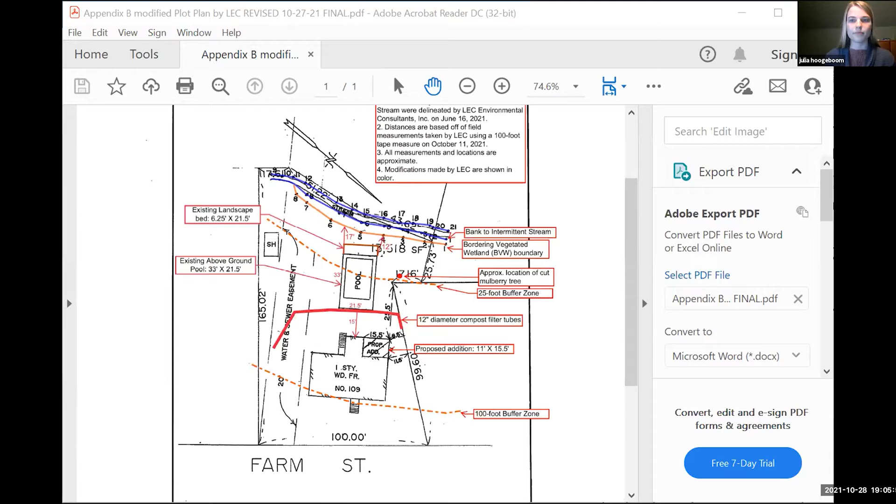Let me just find it here. Okay, can we all see that? Got it, great. Okay, can you see it now? Still see it, yes. Okay, great.

There is an intermittent stream that flows along the rear property boundary. The dwelling is surrounded by lawn and landscape plants, but there is a vegetated upland area that's not lawn, located within the northwestern corner of the property. The backyard does contain an above ground swimming pool surrounded by gravel and enclosed by 6-inch timber posts. The homeowners hired a contractor to construct the swimming pool in 2020, last year, and one mulberry tree was cut to prevent berries from falling into the pool area.

So if you can see my cursor, can you all see my cursor? No, I don't see it. I'm not sure how to make the cursor visible, to be honest, but if you look on the right hand of this plan, there is a red dot, and that is the approximate location of the mulberry tree that was cut. Okay, we see that.

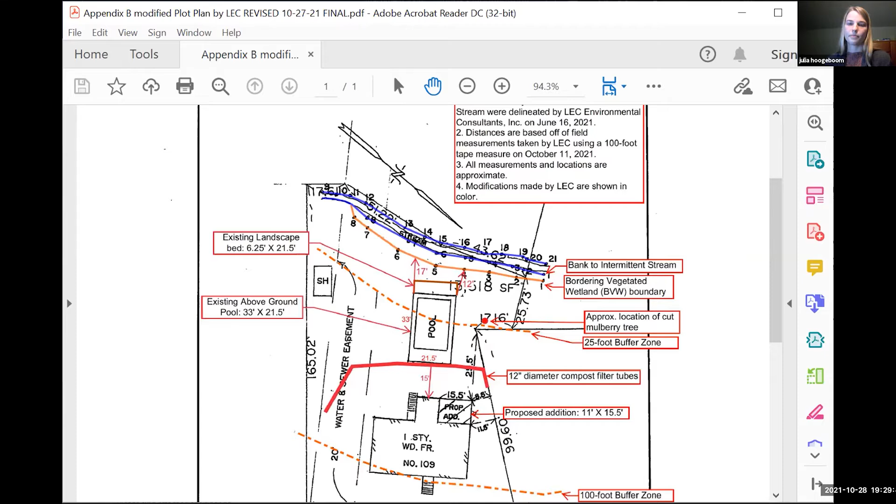The picture's on page 13 of the PDF. Can someone pull it up? I'm not doing too well trying to find it. Julia's getting that, one second here. Oh, so that's the pool - is that the actual pool? Yes, scroll down. Oh, that's nice.

And this is the landscape bed as well as the pool. So that's where you want to provide the landscaping? That's what we have proposed right now. Well, that's really not - how far away from the BVW are you? So that is within the 25 foot, it is about, let's see, about 17 feet from the BVW.

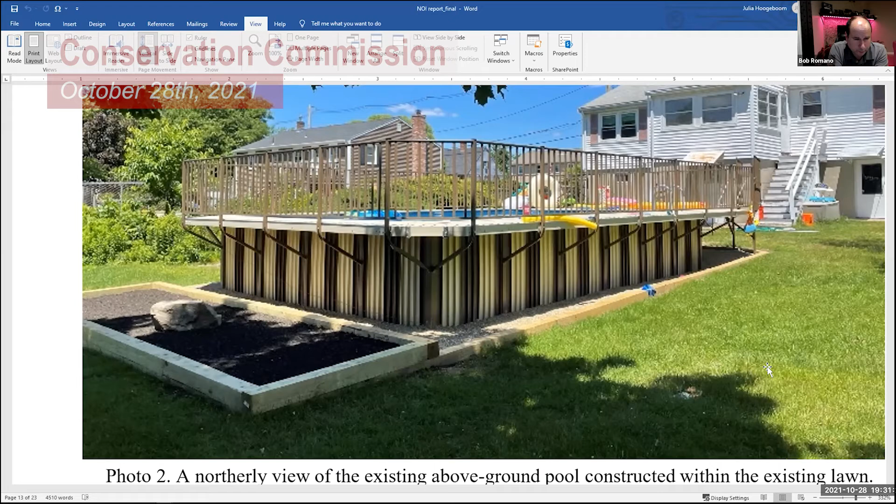So maybe you can go through the benefits of that versus, because I don't know how that replaces the tree, as far as the value of the tree and what it's providing for this area. I don't think you can do that in a planting box. Yeah, probably there should be some enhanced plantings towards the BVW area. Yeah, so we were going off of the tree removal policy on the website, which requires 3 replacement shrubs for the 1 removed tree.

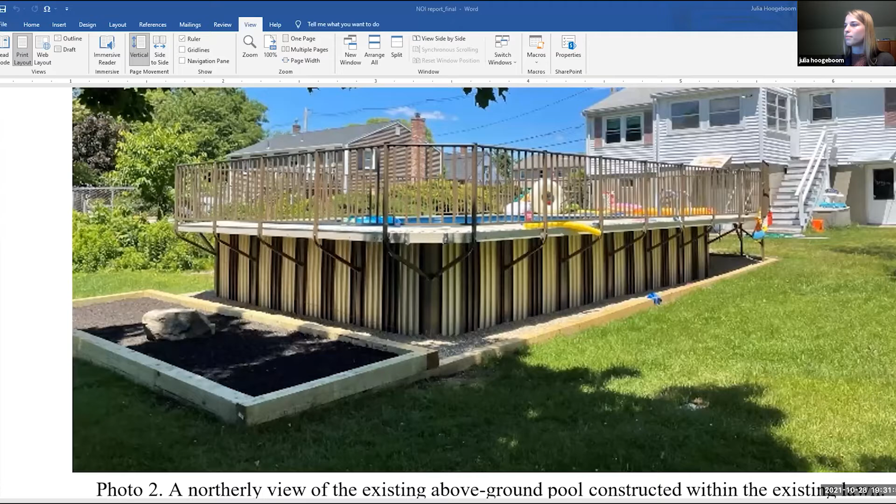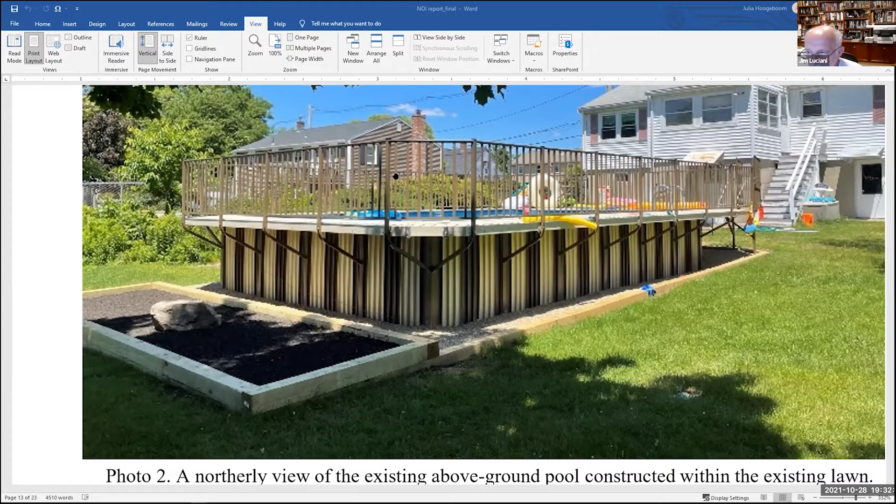So we were using that as our guideline. But certainly, if the commission would like something closer to the BVW, I can pull up the plan again, but perhaps those 3 shrubs could instead go in the lawn area along the stream bank. So how does that planting bed assist in the value of the BVW? I don't get the connection there. I would say you should put a tree in there closer to the BVW because it's going to suck up water better than those shrubs or little plants you're talking about. What's most important is that whatever you put in there enhances the BVW, and I don't think that does it.

But would 3 replacement shrubs rather than 1 sapling tree enhance the BVW if we put them within the BVW area? Well, how big do they get?

The cultivars can get up to 5 feet on center. Do you think that's the most valuable plant for the application we're showing here? If you're trying to provide shading in the brook, what would you be trying to enhance? These native cultivars still provide habitat for native pollinators.

That's good. I would say it really just needs to be closer to the BVW. I think that would help stop the BVW from traveling closer to the pool, because if you take away enough water from the area, the plants are not going to go uphill.

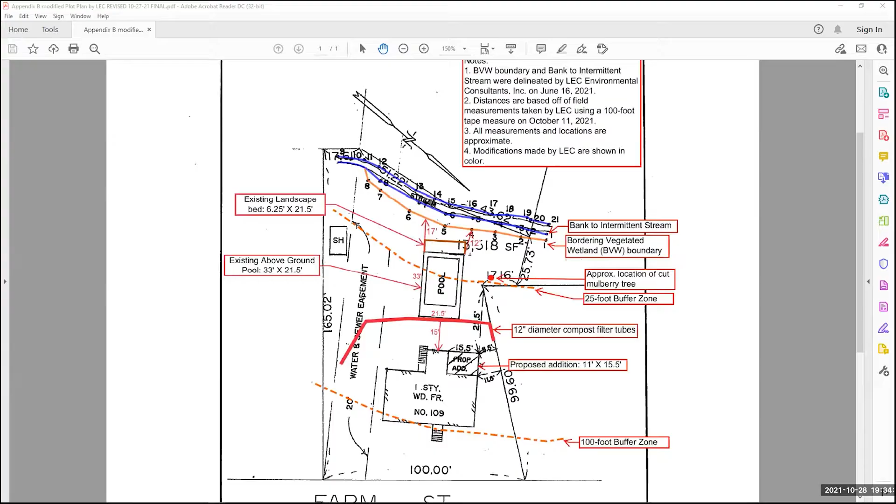Between the two flags, 6 and 7, on the plot plan, there's an area where it dips down, basically a strip with two trees between 6 and 7. Essentially between the orange line and the blue line there's an area that dips down. We would be willing to plant there as well, and when it floods it gets a lot of water there.

So we'd move out of the planter box. We were thinking the planter box just because it was there, and the actual bottom of the planter box does touch the ground there. So we thought maybe that could be a spot since we already had the box there, but it looks somewhat removed from even the BVW, it doesn't seem like a good option.

So the BVW is the orange line, right? I just think there's a better option. I like your other idea of going further along the stream, as long as we can. Can I ask one question though? I'm still okay with doing it between there, but the box is closer than the tree was to the BVW.

Okay, but I don't think... But the tree was a substantial tree. I looked at the aerials, that was a big tree that provided a lot of shade. So in fairness, I think that... No, that's fine, like I said, I don't have a problem.

We don't have a problem putting the bushes in between 6 and 7 there, and even over near flag 2 in the corner over there. Maybe we could put 1 or 2 over there, and then 3 or 4 between 6 and 7. Would that be enough for you guys?

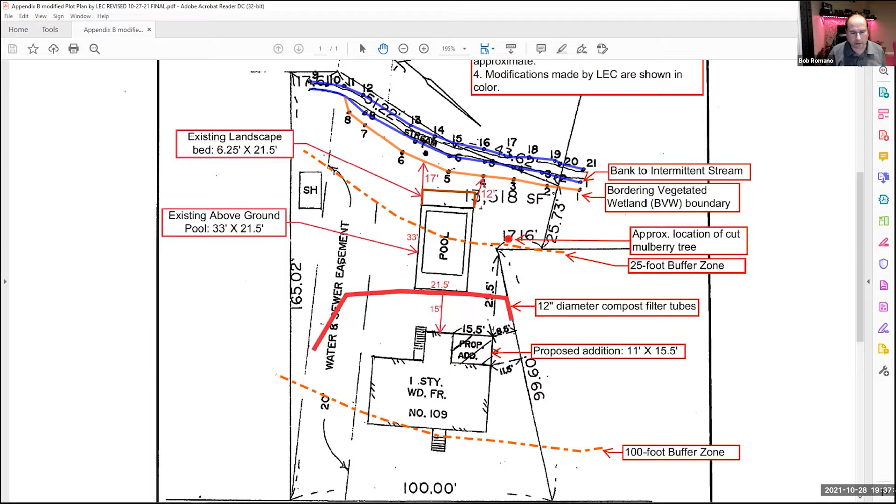So it would be time to visit if somebody wanted to. Do other members of the commission feel like they can envision what this should look like? We can feel that this really does make a material step forward that offsets a step backward, then that's fine. But it's hard for me to look at this schematic and make that conclusion.

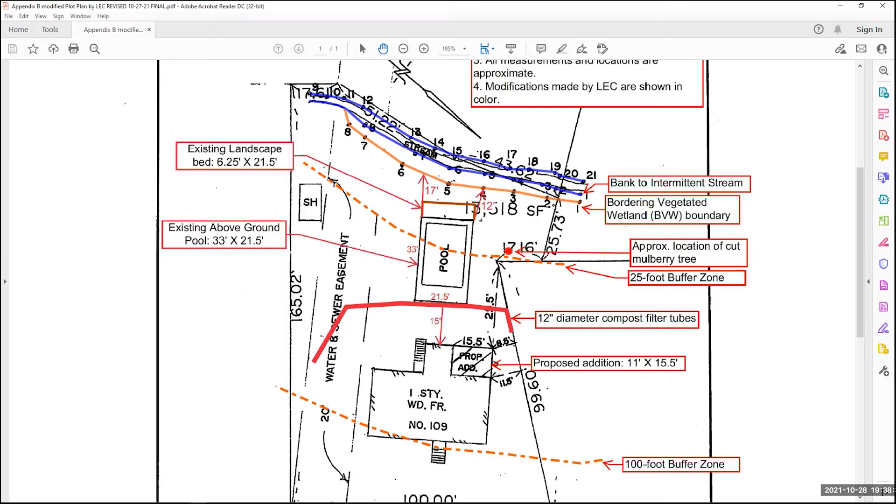That's all. Julia, I believe in your paperwork you had some pictures of that area. Would that be helpful to show those? Of the wetland corner, the stream area, where they flag it. Let me pull those up.

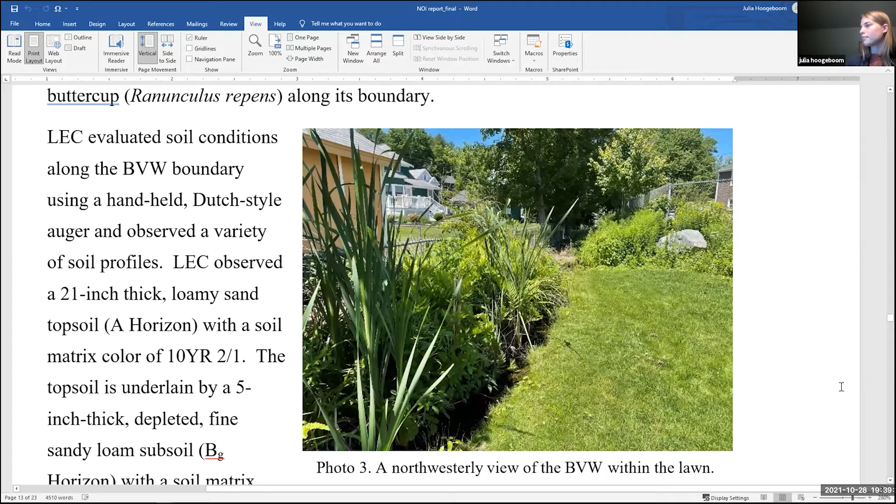So that's down in the corner by flags 1, 2, and 3 on the plot plan. That looks pretty good there. There's also another view I can pull up. I definitely remember this property. You guys have better memories than I do. I remember it too.

Is that the tree you took down? No, this is the stream along the rear property boundary. You can see the pool in the background of this photo to the right. The tree was taken down on the other side of the pool. So this is the area I was talking about between 6 and 7 that we would be okay with planting on, probably closer to the far tree instead of the one right here in the corner, down in this little area really close to the opening of the stream.

And these trees still exist? Yes. Okay, so they're providing some shade for sure. Well, it's providing shade, and also what might be beneficial for this situation, because they have a water problem with the stream, is plants that absorb a lot of water. So if there's something that can do that, that's what we should be shooting for, I would think.

Julia, you'd know better than I would what would satisfy that requirement. What would be the best plants that we could put up there to help alleviate their water problem? For plants, we can certainly put in wetland shrubs, like sweet pepperbush. They are a wetland plant that are water loving, so those would certainly help. And how do they compare to a tree? I know a tree can suck up a lot of water.

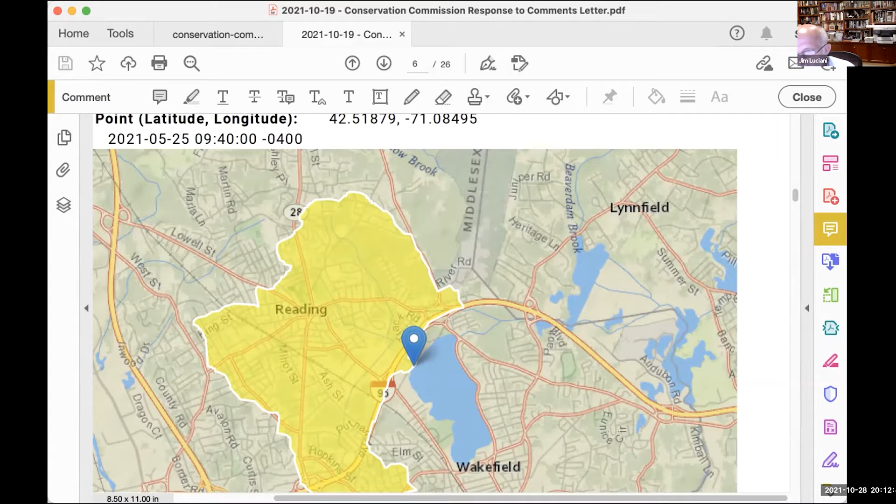Are you thinking that the water from here is flowing down here, going underneath 95 at this location? I don't know. It doesn't sound like you've investigated it enough to tell me, or even know if there's any real effect. This may all be for nothing, or maybe it's going to affect your design. I don't know—Nicholas, do you have any other information on this?

Yeah, this is Nick with Allen and Major Associates. Scott, I've visibly seen the pipe coming underneath 95, just west of our property. You've seen that, right? Yes, and it comes right out to where you've delineated the top of bank for the stream going through there. Correct. And I don't recall seeing water coming out of it, but I'm sure there is.

Have you seen water flowing out of that pipe in the field? My recollection is that it had water at the time of viewing, yes. But I've never investigated this location right here. I haven't either, that's beyond our scope. It's very far away, but to see if there's any kind of a pipe underneath 95 at that location, I just don't know.

To elaborate on why you're not seeing water from that stream enter the lake, like Scott said, the culvert that passes below the parkway is pitched backwards back towards our site. So the stream and the wetlands within our property, the water has to build up to a certain elevation before it starts overflowing into the lake. So when you were out there witnessing the recent storm, there may not have been enough water built up yet, or it may have been passing underneath an obstruction like leaves and branches, not visible. But I haven't, at least recently, evaluated the condition of that outfall at the lake edge from that culvert.

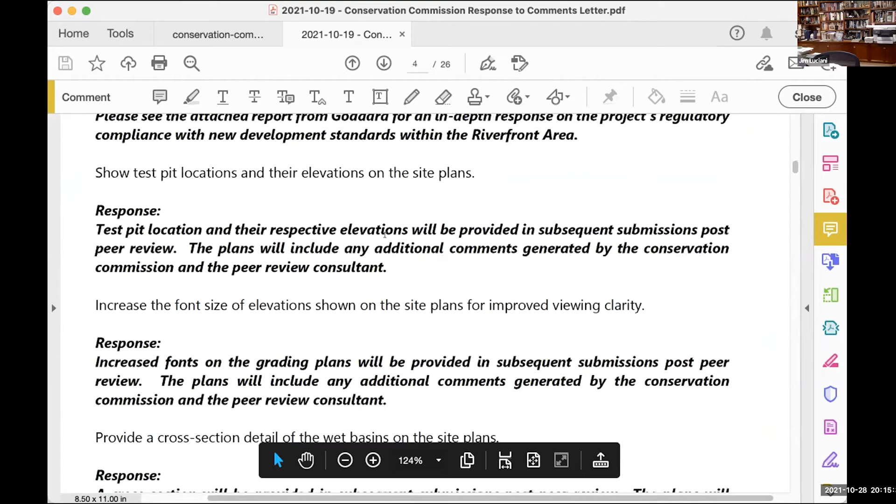I was looking at old maps of this area, and it seems to me, like Bob was pointing out, there's another path that ties right into the Saugus River. So if that was the outfall, that may be the outfall for this 3.5 acres, not Quannapowitt Parkway, and maybe it is. You've got 2.5 feet of head between the 95 pipe and Quannapowitt Parkway pipe. There's a lot of head there, it should flow.

And if we can just focus really quickly, back on the scope of our work. No, this is important, I want an answer on it. I'm not going to let go until we get an answer.

I just wanted to put in there that everything from our development sheet flows into that stream, regardless if the 9 acres from Reading goes there or not. That's where it's going to be going under proposed conditions, but if it ends up flowing the other way, it might have an effect on your design.

So I think I'd like to keep moving forward. I've noted that there's an ongoing question that's important to be answered here. Nick and I will put our heads together for a bit further field investigation that's going to be substantially off-site. But I'll also investigate that connection point between the stream and the lake to the better satisfaction of the commission. Maybe there need to be some more spot grades, or is the stream just full, silted up?

Well, I think we have a lot of spot grades, right, Nick? It's not a matter of more survey work that's needed as far as I'm understanding. Is that correct, Nick? Yeah, I think we have all the information we need within our property, including the inverts of that culvert going into the lake, which again is sloped backwards, which is causing the stagnation of the water and the appearance of no flow. Exactly. Oh, okay, it's not an appearance, it would be no flow.

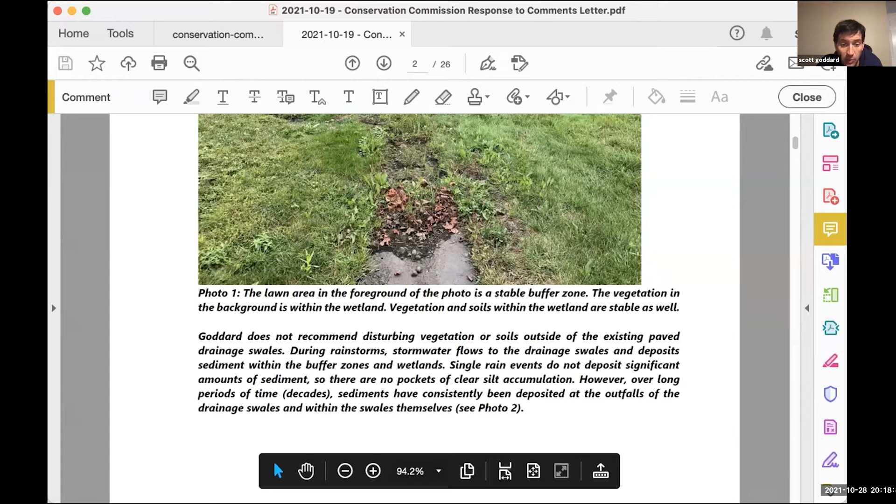But what we can do is take care of deferred maintenance of the swales, as all stormwater features should be. These swales should be regularly cleaned, and that's exactly what we propose to do with these decades-long swales. There's one there, I think there's another picture right here. Yeah, there's another one here. We'll go through and clean out these swales so that we don't have transportation of the sediment within these swales during storm events.

It's probably reasonable to continue with normal sweeping procedures on site. When you say you're going to clean out the swales, is there asphalt on the bottom of the swales? Yes. So would you be repairing that? Would you be taking that out and making a new swale?

No, this is a very temporary measure, because once construction of this project begins, all of these features go away. This is just temporary in the meantime, to further alleviate the issues we're currently seeing - just some delayed maintenance of the existing conditions. Once the new stormwater infrastructure Nick's going to talk about tonight goes into effect, everything out there becomes defunct. It's getting a complete overhaul to meet current regulatory standards.

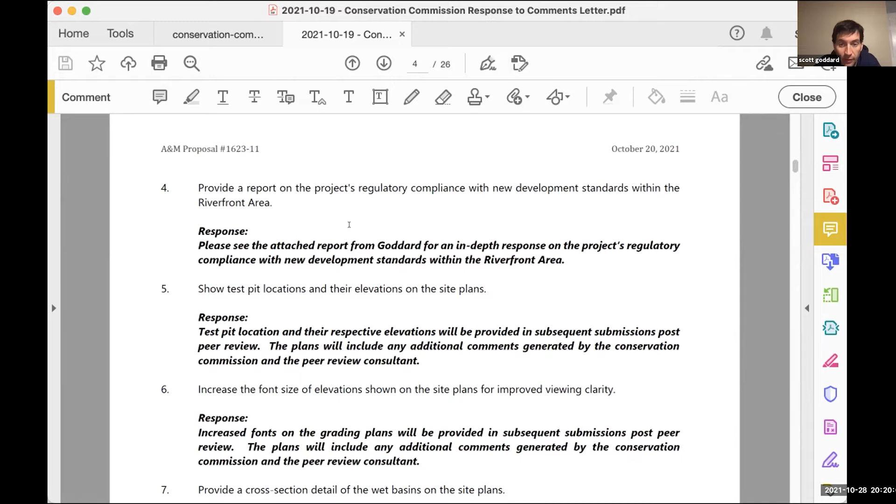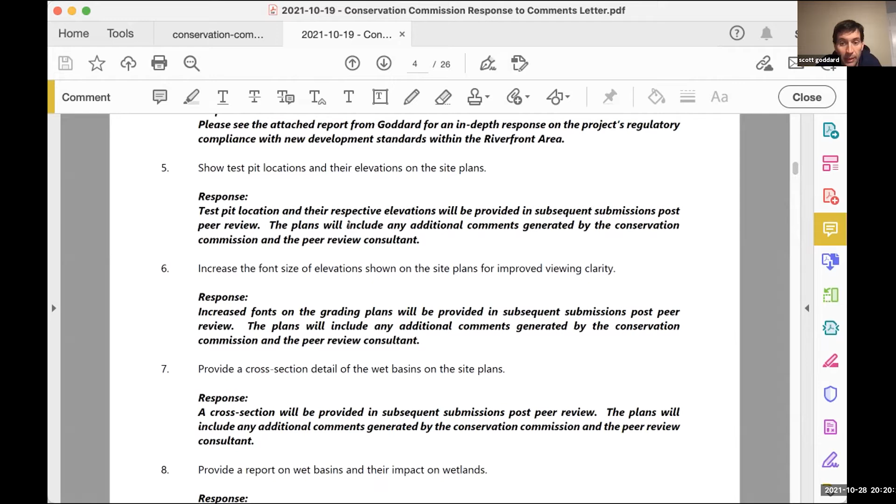Number 4 talks about regulatory compliance for new development standards in the riverfront area - I'm going to save that till last since it's at the very bottom. Number 5 was showing the test pit locations and elevations on the site plans. That'll be included in subsequent plans - a fairly minor add-on, but we'll save that till we have a new plan submission set.

So when would that be? Is that when your plans are finally all approved? You're going to supply that information? I can provide some color on that. Candidly, we have some minor plan revisions in the works that largely don't impact our Concom submission, but are still in the works for a ZBA submission. So we'd be expecting to submit a minor modification in the next few weeks, at which point we'll include that in the plan set.

So you're just waiting to get all your revisions together and put it on one plan. That's exactly right, Jim. So we'll see that information before we get to any point that we're finished with this. Absolutely. If through the BSC peer review we come up with other modifications needed to the site plan and a new set is submitted, that set will include that data.

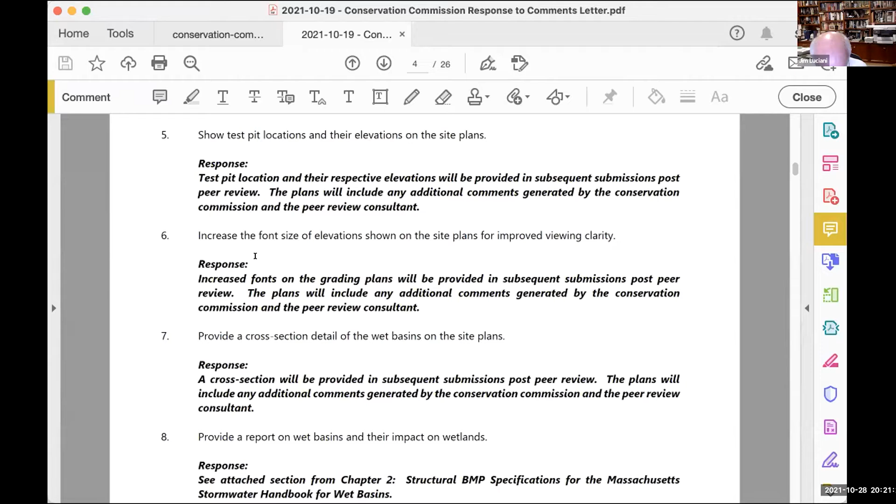As well as point number 6, the font size of the elevation request - something else that will be detailed on the next plan set revision. Same with the cross section of the wet basins. There's an attached response to this as well that includes further discussion of wet basins. I think we'll let that be part of the presentation tonight with Nick.

There was a question about the soil suitability assessment for on-site sewage disposal forms, and this is simply a standard form. That's not necessarily indicating there's a sewage disposal system being proposed, because there is not, but it's a standard form used by the Commonwealth of Massachusetts DEP to log soil conditions and high groundwater conditions.

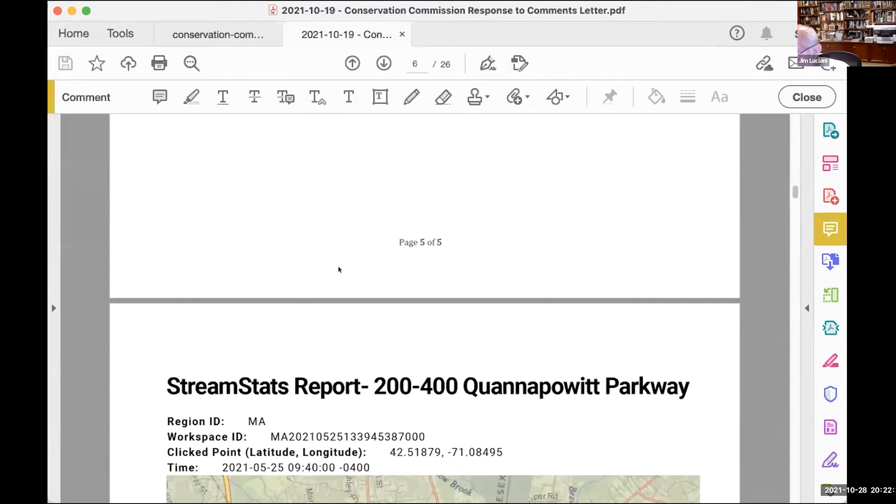But that form also has a signature page for whoever is providing that information. I know the last page of that form was to have someone sign it to say that they filled out the form. Correct - are you saying the form was unsigned? Is that what the comment is? No, if you look at the last page on Form 11, it's a signature page saying that you're attesting you've done this correctly.

I don't know if you've seen that page, but there should be someone's name on it to say they've done the work. And I haven't seen it - is your comment that there was no name listed? Is that the comment? No, there's the form, you sent us the other pages, but you didn't send us the last page.

Yeah, I can comment on that. I don't think that was provided by Haley and Aldrich. Matt, maybe we just circle back with them, get that signed form, and we can attach it to these soil logs. Okay.

So we attached the stream stats analysis, and then there was a regulatory compliance report. The discussion we had during the riverfront analysis was that this project is really a textbook redevelopment project. Nearly the entirety of this riverfront is previously developed, with a significant portion of it being degraded. Some portions are previously developed but non-degraded - those are the landscape islands and the lawn area up against the riverfront area. So this really is a redevelopment project under 310 CMR 10.58(5).

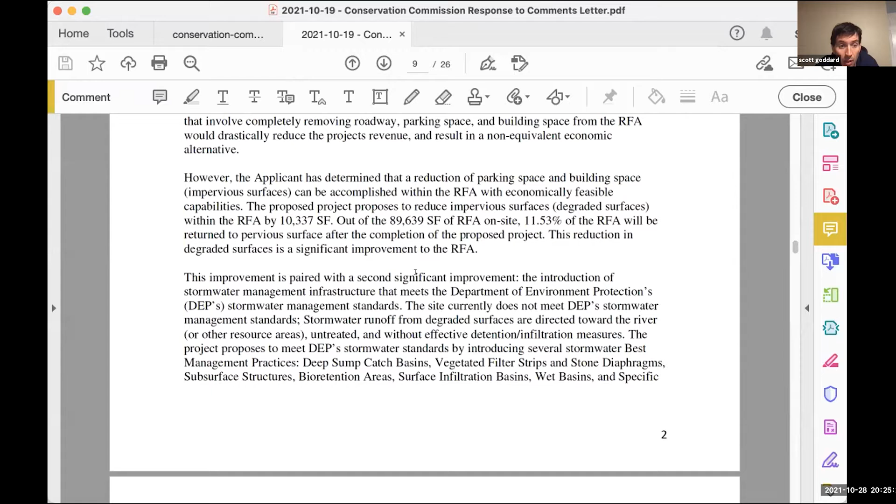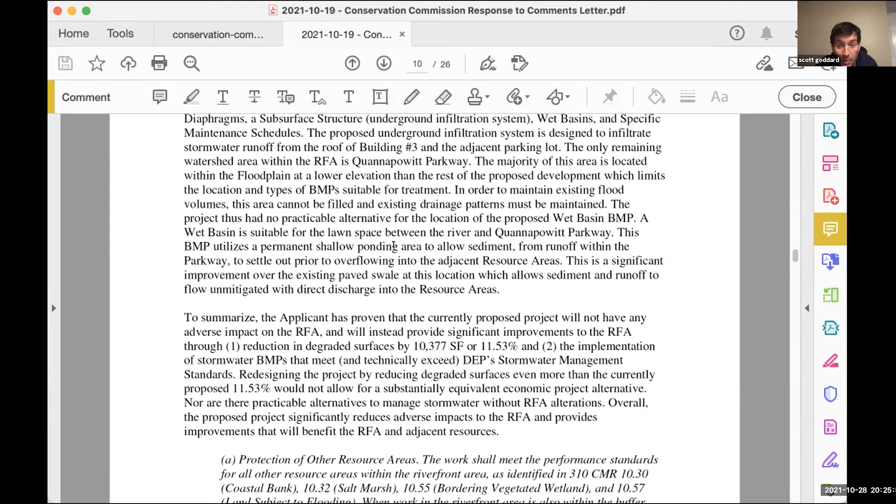This area talks about us taking 11.53% of the riverfront area and returning it to pervious surfaces that are currently impervious. So instead of further impacting riverfront area, we're actually improving it in the other direction, which is the very opposite of a new development kind of process. We talk about protection of other resource areas, which we have some consideration to bordering land subject to flooding. We have no rare species.

We talk about economic alternatives and how to do an alternatives analysis. Again, for redevelopment, there's no standard for an alternatives analysis because the standard is you have to make the site better. When you do a new development process, you're looking at which alternative is proposed that is economically equivalent and meets the standard of no adverse impact. No adverse impact is the whole 10% deal.

So the alternatives we talked about was keeping the project just the way it is. That is a very viable alternative for the site. In fact, before this development was proposed, there was consideration for reuse of that current building. That would not have any stormwater upgrades, and it would not remove any of the impervious surfaces within the riverfront area. All those degradations currently existing within the riverfront area would stay, and that meets all the laws for that current use to stay. So our proposed activity is actually far superior to that.

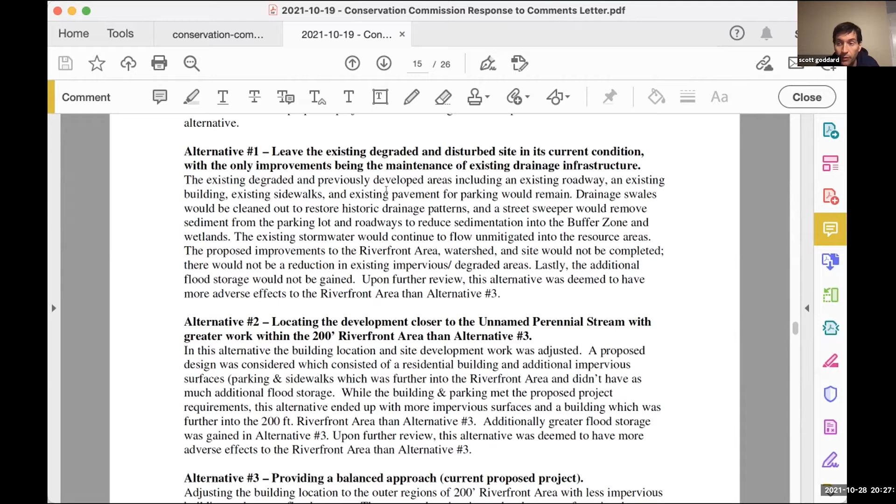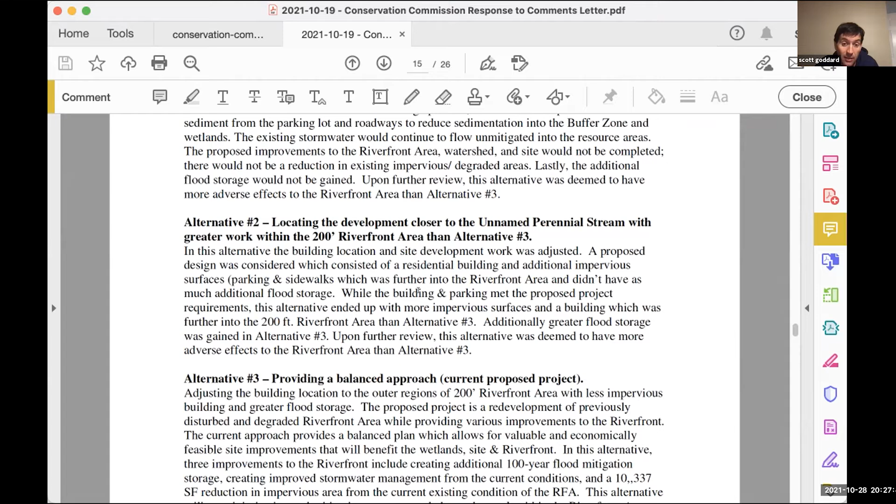The second alternative would be that we could take this whole development and shift it all closer to the river and still meet the standards for not further degrading the riverfront area. That 11.53% of riverfront area that we're removing the asphalt in, we wouldn't have to do that. We could keep it as it is, or potentially if we apply new development standards, we could increase that by even another 10%. So that standard, though it could meet the regulations, doesn't have less adverse impact to the riverfront area than our current proposal. So we have what we believe is a very balanced approach.

Our current proposal, we see as a project that improves the riverfront area ecologically—stormwater, setbacks, degraded surfaces within riverfront area—all being improved to the benefit of the river. That's outlined in here. Standard D is the no significant adverse impact standard.

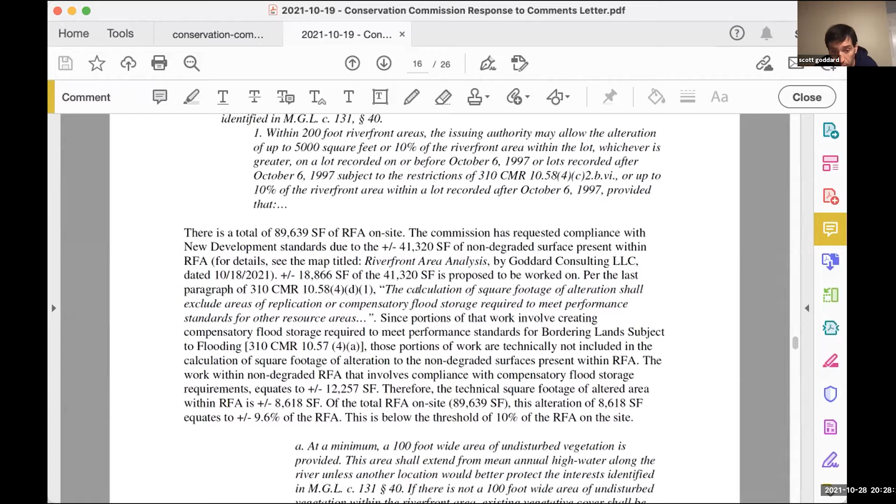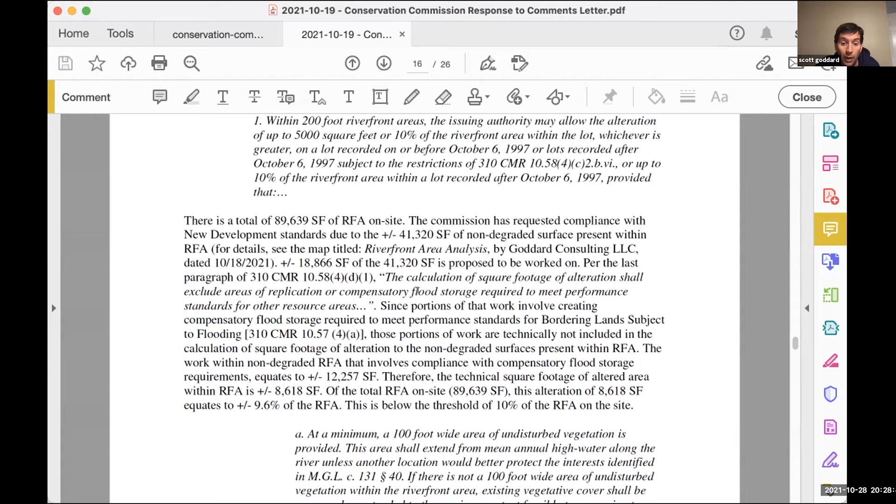There's less than 10% of areas that are currently lawn that would then become not lawn. If you look at them as if everything currently was staying there, that's not an appropriate way to do it, but that's the only way to evaluate a new construction standard for a project like this. We do keep that at less than 10%—it's at 9.6%. So it meets that standard if we apply it in that sense.

We also are required to do stormwater management in accordance with the policy. That's going to be the purpose of the balance of tonight's meeting—to talk about how, in fact, this property is now going to be subject to current stormwater management.

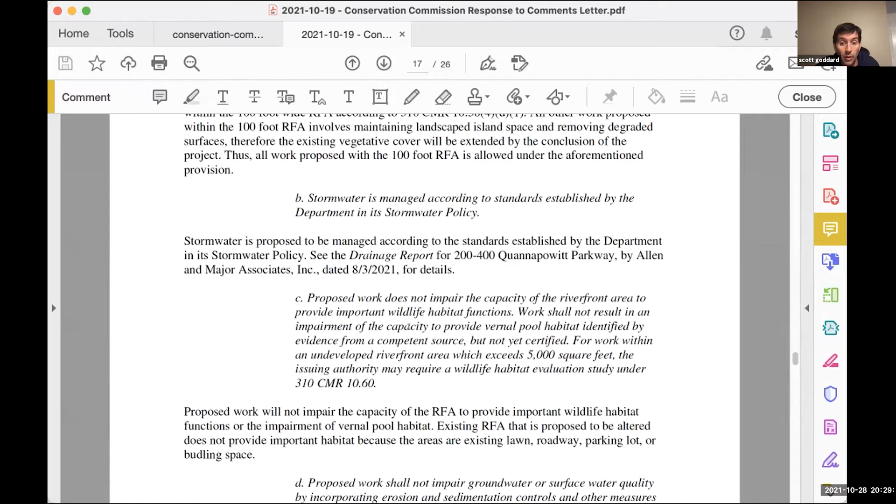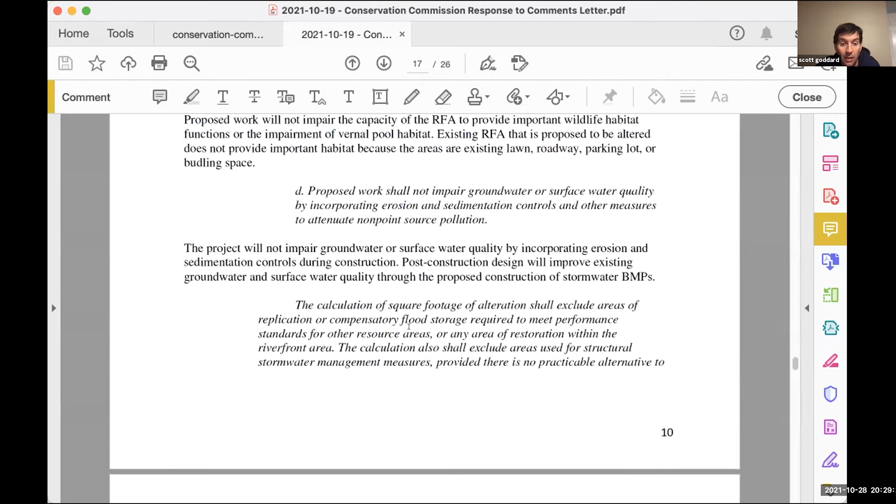So then we also have the ability to not count the area of the stormwater against the 10% or the alterations within riverfront area. That's allowable by new development standards. That's right here: the calculation shall exclude the areas used for structural stormwater management.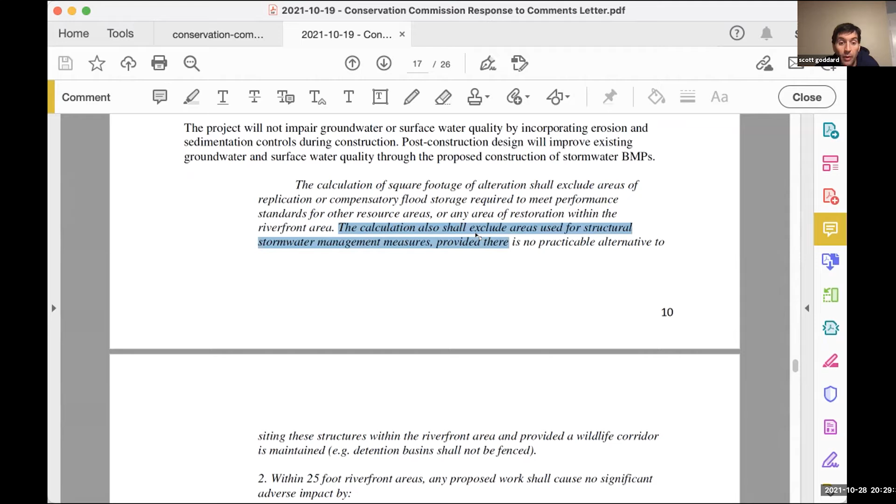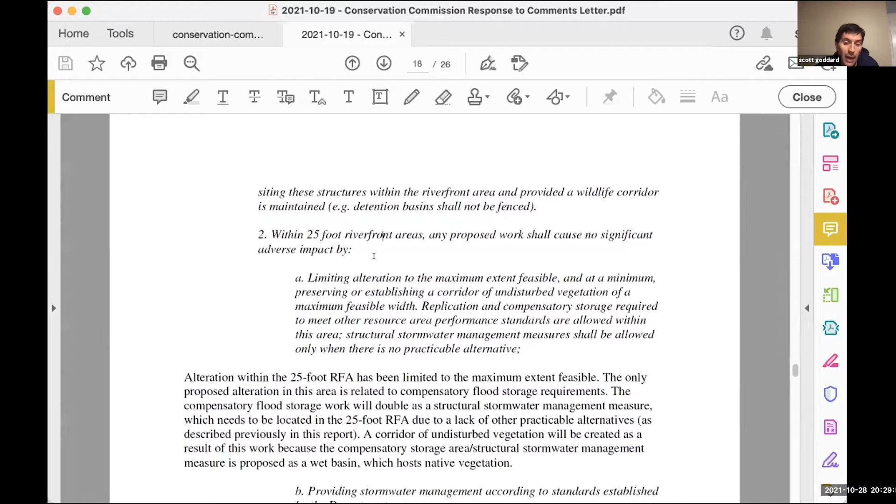We looked at ways in which that can be pulled back further. Nick's going to be able to talk about that tonight, about why the stormwater is proposed to stay where it is and why it can't be pulled further back. But I think that will be a useful topic to talk about after Nick gives his presentation this evening.

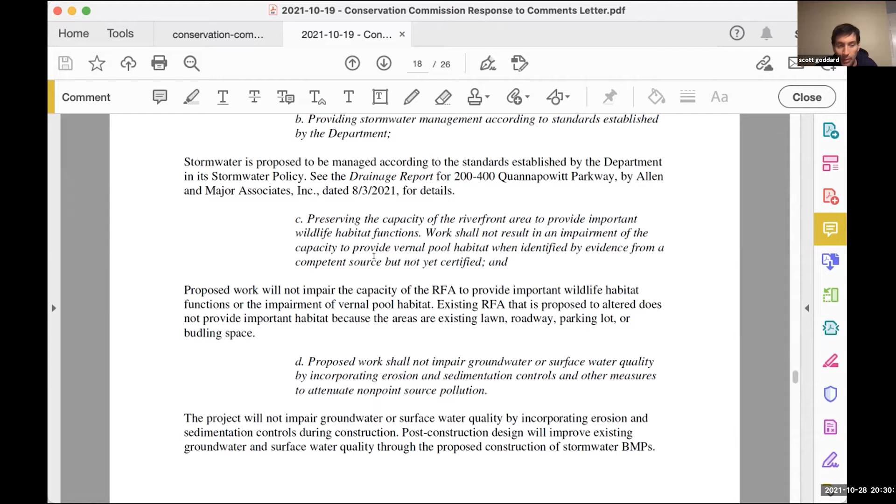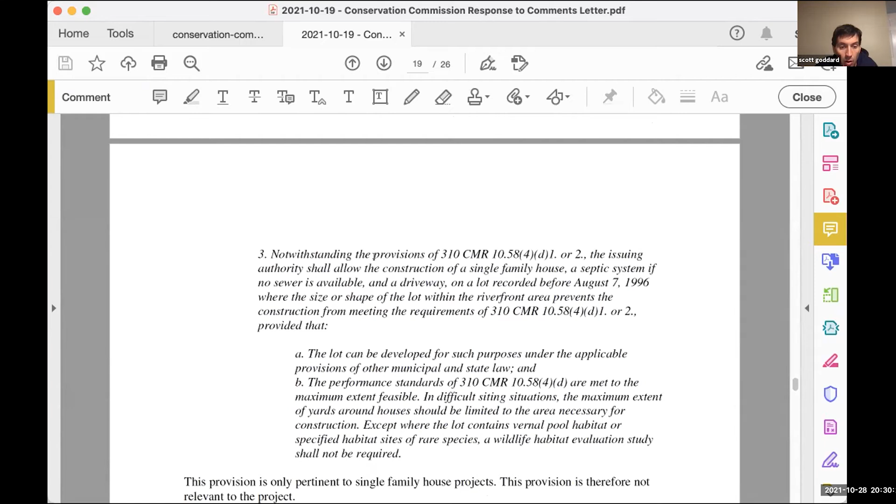The preservation of the capacity for wildlife habitat—the stormwater management feature is going to act as a wildlife habitat corridor and enhance the current absence of one, because it's basically just lawn area right now. So we're going to be improving that area as well. Your 25-foot zone is going to be further protected than it currently is. So all that is working to the favor of the commission and their regulations via this project. You can read through this if you'd like, and we can talk about it more.

My overall view on the riverfront standards is this: it's a redevelopment project, which requires a more strict set of regulations to meet the new development standards. So if the commission wants the highest level of protection for this stream and riverfront area, the commission will want to apply the redevelopment standards. The applicant and its team have done that very thing. There are substantial improvements being made to this riverfront area that I think should be applauded, which will provide improvements not just to the riverfront area, but also the receiving waters, the lake in this particular case.

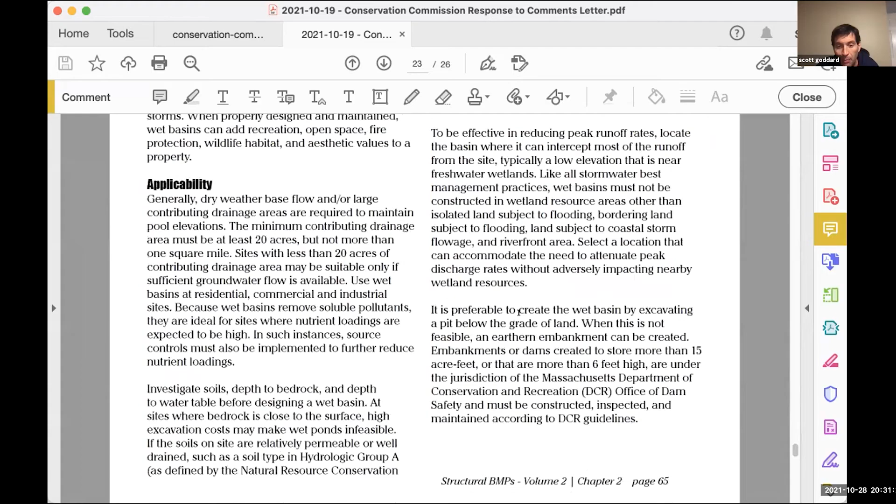There were some attachments discussing how wet basins function, which is a separate topic now. I think this can be brought back up as Nick presents how wet basins work and their role in the stormwater management system. Rather than take up more time tonight since we want to emphasize stormwater, that's kind of a recap of the outstanding matters from the prior weeks. I'm happy to take brief questions on it before we move on to stormwater.

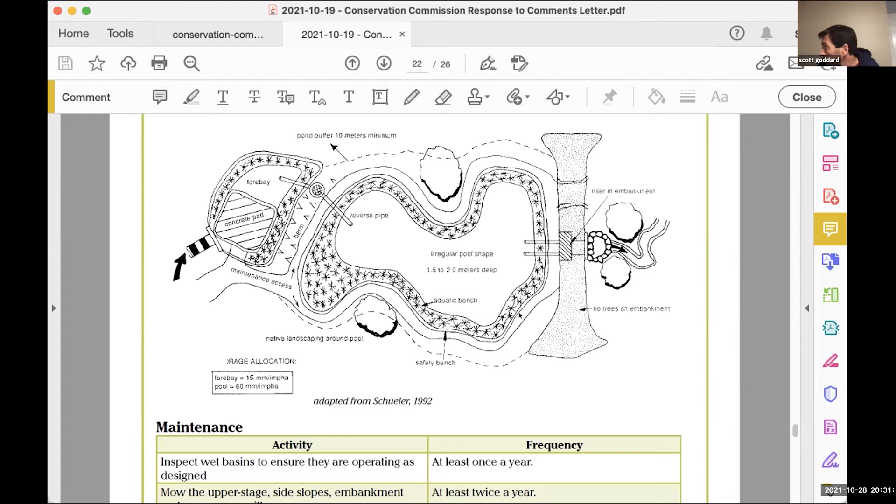I have a question if I might start. It's not really about the review that you did here, it's more a question to the commission. And that is, actually, it's a question to you: are you applying under 10.58(5) and want to stick with 10.58(5)? Yes. Okay, so then I guess my question is, because we have a peer review, do we

want to ask the peer reviewer to take a look at both standards and do an evaluation under both, or do we want to say this applicant has applied under 10.58(5) redevelopment, just evaluate it under redevelopment? Because I think we should give our peer reviewer some guidance.

That would be the request of the applicant, is to review it under 5, and I think that's the more strict standard. So I would hope the commission would go along with that approach.

Okay, so we clearly have the applicant's answer, and I guess my question to the commission, for the benefit of the peer reviewer, is what you want to do here. Do you want to have it looked at for both, or just stick with the one?

I think I'd just go with your recommendation, Elaine, myself anyway. Which is to do what? Whichever one you said would be more beneficial. It sounds reasonable to me to call this a redevelopment.

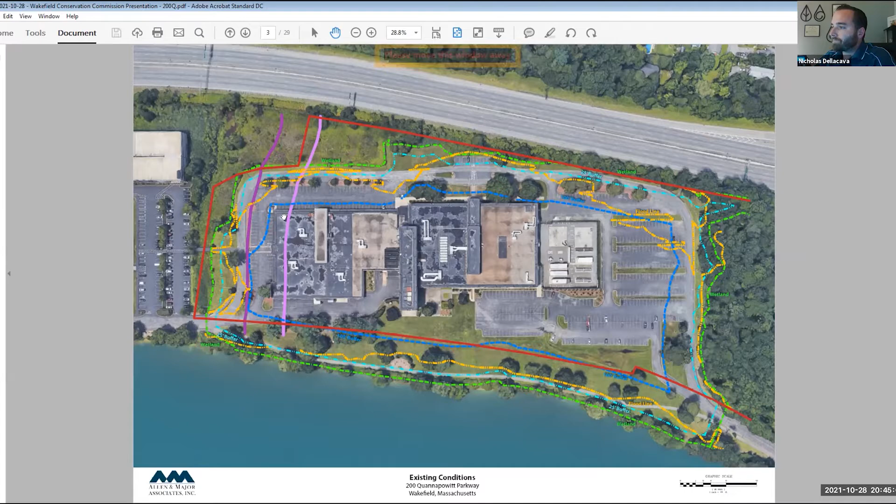Moving on to the proposed improvements. Given the current condition of the site and the resource area restrictions, the proposed design had many challenges to overcome. We began by first setting 4 primary goals. The first and arguably most important was to improve the quality of stormwater entering the lake.

This was achieved by capturing the majority of the total suspended solids, including large floatables, petroleum-based contaminants, and sediment. It also requires a substantial reduction in the total nutrient load leaving the site. Nutrient loads for this exercise were focused primarily on nitrogen and phosphorus, and reductions are quantified based on the capacity of each of the stormwater management system components to hold a certain volume of stormwater on site.

Once we accounted for the quality of stormwater leaving the site, which became the driving factor in our design, the remaining goals fell into place, which include reducing the frequency and severity of on-site flooding, groundwater recharge, and peak rate attenuation.

Lake Quannapowitt has fallen victim to years of untreated nonpoint source pollution through stormwater discharges all around the lake, which have ultimately rendered the lake unswimmable. To combat this issue, the Clean Lake Committee was established.

One of the primary goals set forth by the committee is nutrient load reduction. The committee has identified approximately 24 properties or watersheds around the lake which discharge large volumes of untreated stormwater into the lake. 200 Quannapowitt Parkway is on that list. Therefore, the town engineer, who's also the chair of the committee, has recommended an 80% or above annual reduction in nutrient loads leaving our development.

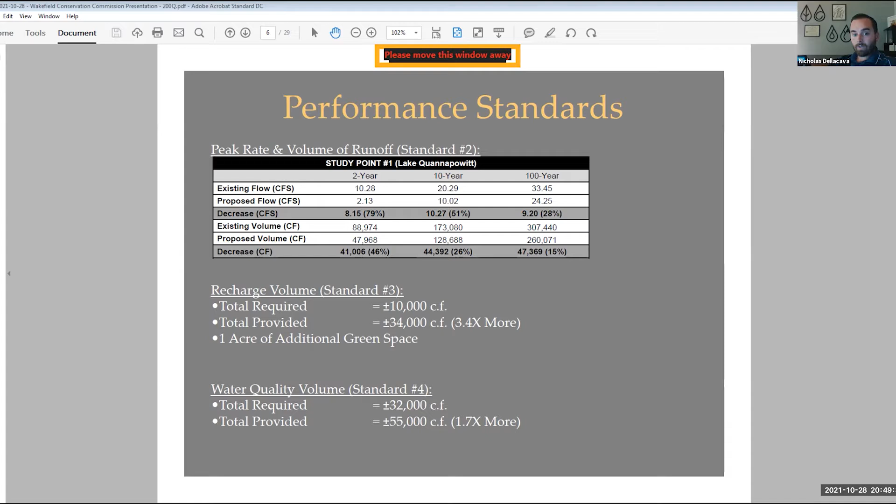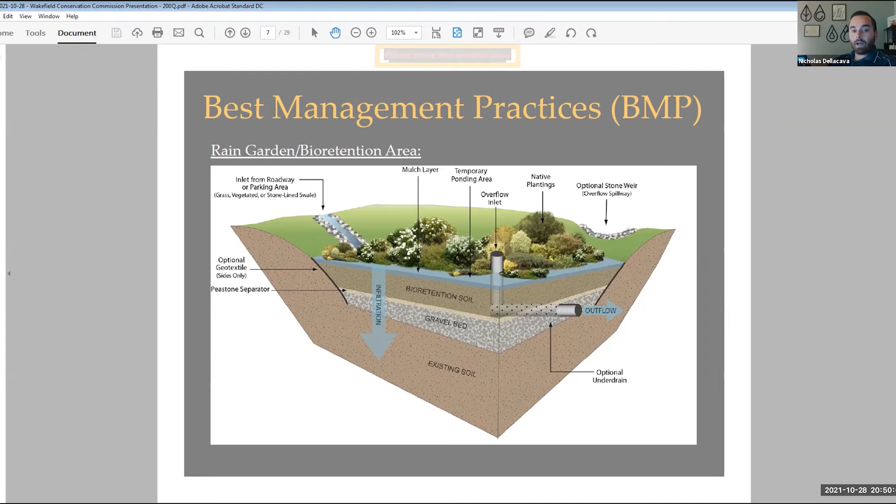The following BMPs are being proposed under the new development. First, we have a rain garden or bioretention area. These are essentially shallow depressions filled with sandy soil, topped with a thick layer of mulch, and planted with dense native vegetation. Runoff is directed into the cell via pipes or sheet flow across the surface, then percolates through the soil media like a filter and eventually infiltrates into the groundwater. Our rain gardens will be equipped with overflow inlets and under drains to convey larger storms to the underground chambers.

Underground chambers proposed for this project are manufactured by ADS StormTech. These are plastic, open bottom, corrugated arch chambers, connected in series and configured in rows surrounded by crushed stone on all sides. The void space within the chamber walls allows stormwater to back up inside the system and slowly be released through an outlet control structure and or infiltrated into the groundwater.

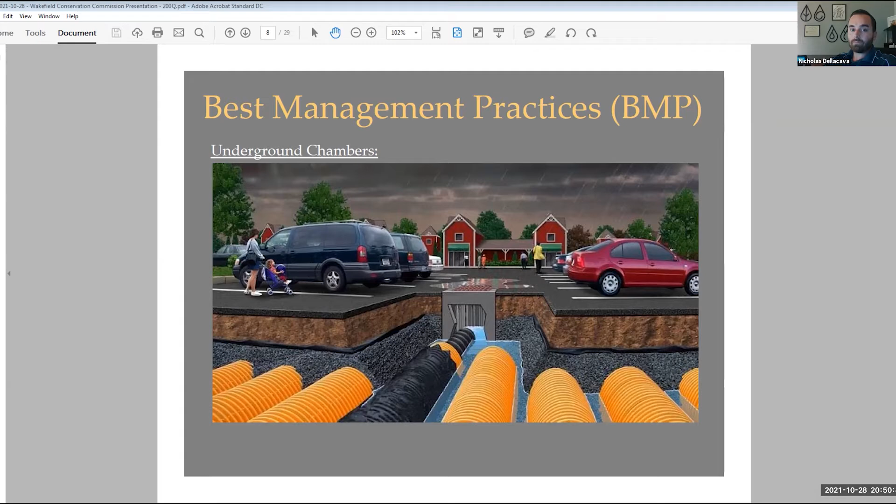Next, we have infiltration basins. The basins proposed are very similar to the rain gardens in that they are above ground areas used to hold and infiltrate stormwater, but do not include a thick layer of mulch or dense vegetation such as trees or shrubs. The infiltration basins are also not equipped with under drains. The larger size of these basins allows them to hold a greater volume of water than your typical rain garden. Runoff will be piped to each of these basins with emergency overflows to mitigate the larger storms.

Then we have these vegetated filter strips, proposed at all of the existing paved drainage swales along the edge of the perimeter parkway. These filter strips are equipped with a stone diaphragm that acts as a level spreader, slowing down surface runoff from the parkway and distributing it evenly over a large surface area and into the wet basins.

The wet basins proposed are intentionally constructed within the floodplain and the groundwater. These BMPs use a permanent pool of water as the primary mechanism to treat stormwater. The pool allows sediment to settle and remove soluble pollutants. Each wet basin is planted with wetland seed mix and equipped with an additional dry storage capacity to control peak discharge rates during larger storms.

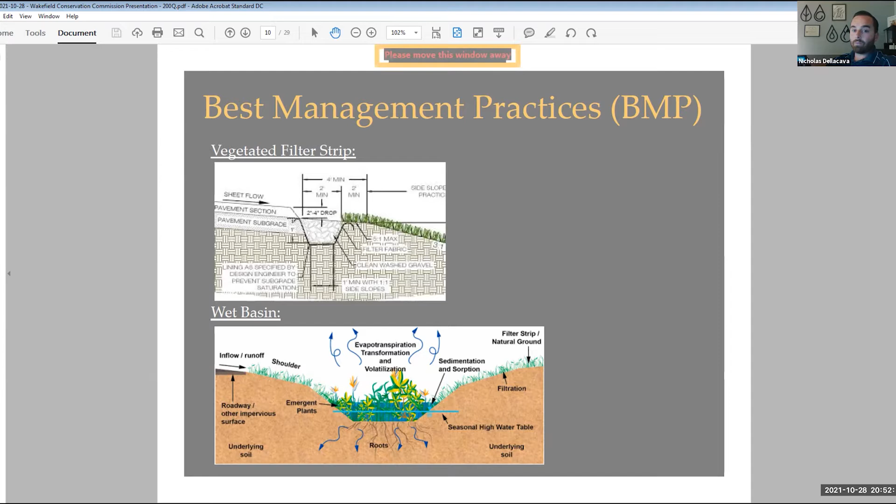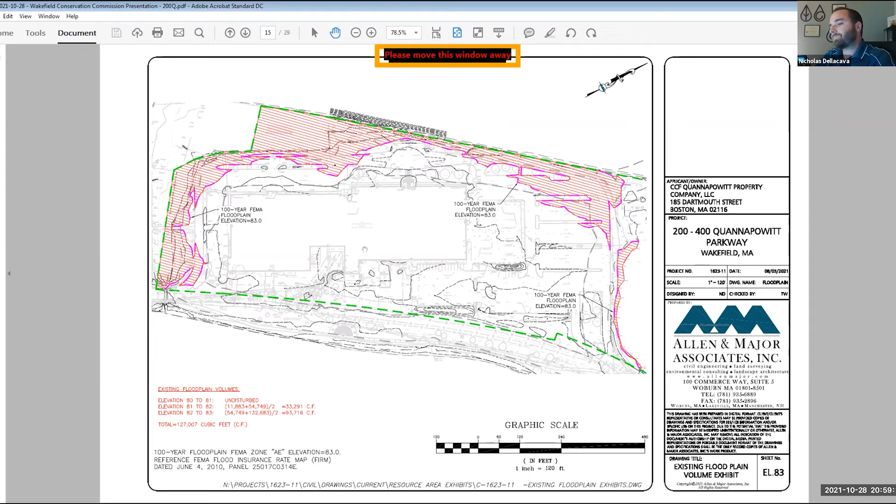This is elevation 83. Again, this is just the existing condition, and that's the 100-year floodplain. Between elevation 82 and 83, there's about 94,000 cubic feet of storage, totaling 127,000 cubic feet of storage overall.

Going into proposed, our 81 contour, you can see it's now occupying some of these wet basin areas where you're getting a little bit more storage from.

This is the 82, occupying even more, if not all, of these wet basins. And between elevation 81 and 82, we're at 54,000 cubic feet. And then once you get to 83, it encompasses all of the wet basins and then portions

of the parkway as it exists today. And from 82 to 83, we're at 109,000 cubic feet, totaling 163,000 cubic feet of storage. So I think that's our stormwater management system in a nutshell. I'm sure you have questions, and happy to answer.

Where does the roof runoff go right now on the existing building?

So the existing building, the majority of the roof runoff, there's scuppers on the roof, and it flows off right off the roof and down to the ground, and then into the parkway and into those paved swales. There is a small portion, I believe, based on the information we have, that actually gets piped underground. I found the pipe, I have pictures of it, that discharges into the swale at the back of the property.

Yep, so I'll just zoom in on this one for an example. You're up at like 82.25 elevation-wise within this.

The parkway slopes down to the 82 contour here, going into the vegetated filter strip, down to 81, and then the bottom of the basin sits at elevation 80. There's an emergency spillway here at 81.50. So whatever water comes into this wet basin isn't going to leave unless it goes into the ground, or unless the basin fills up to elevation 81.5.

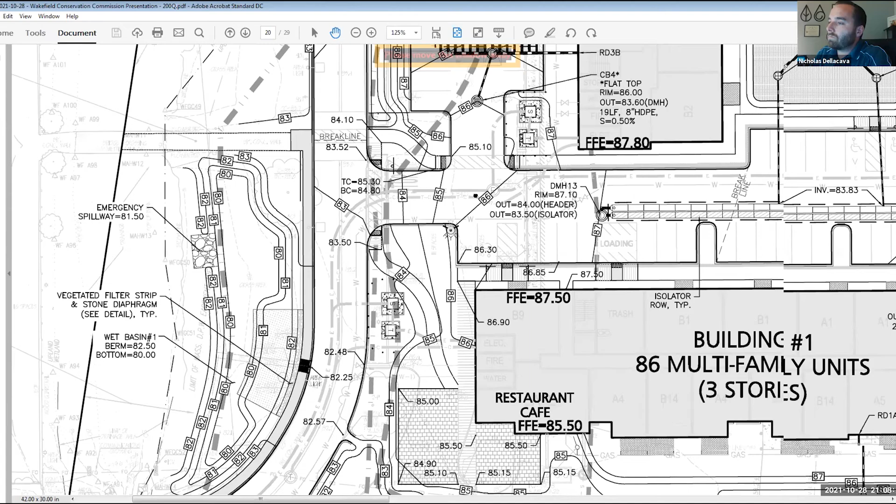So the water quality volume that we're calculating, and similarly the recharge volume, is whatever volume is below this 81.5 elevation. What if the water level is above 81.5? That's discarded. Yep, so in our HydroCAD model, we actually have these ponds sized and we can set an elevation, and in this case it would be 81.5. You run the model and it tells you the volume of water within this basin below that elevation, and that's the volume we take into account when we're looking at the water quality volume or the recharge volume.

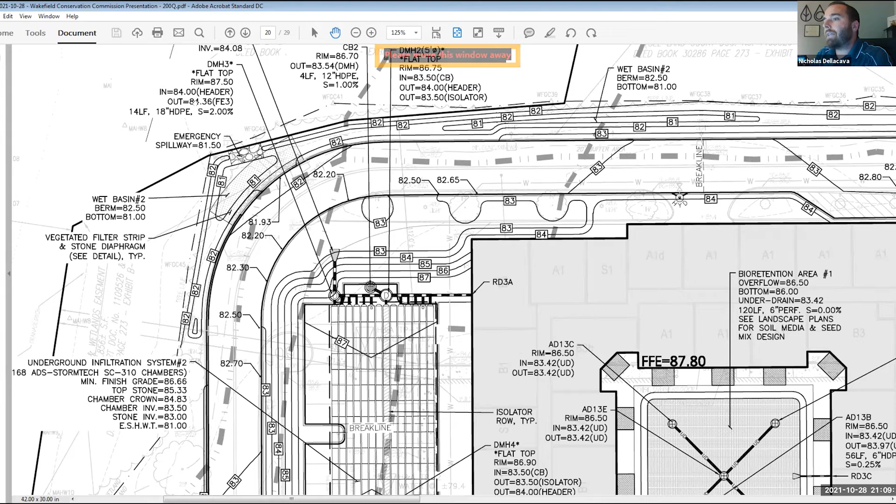And the same goes for any of these systems, like these chambered systems. We have the top of the stone - the bottom of the stone's at 83, top of the stone's 2.5 feet higher than that. But there's an overflow here at 84.36. So if my chamber is at 83.50, it can build up about almost a foot of water in these chambers before it starts to overflow and leave the system. What storm event would that represent? I'd have to look at the HydroCAD sheets, but it's about the 2-year storm.

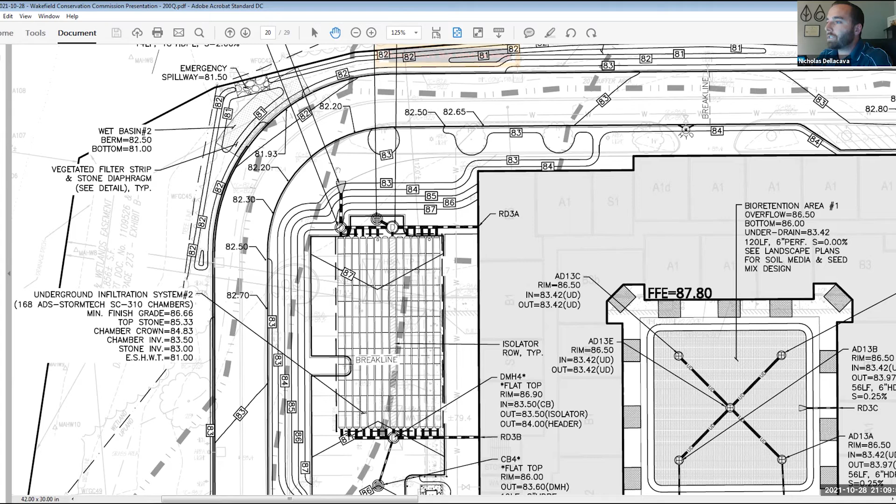It's not really an exact storm, because during the 2-year storm you might have just a little bit more than what this can hold, so you might discharge some, but it's somewhere right around the 2-year storm. So there will be times where there could be as much as a 1/2 foot of water in these wet basins.

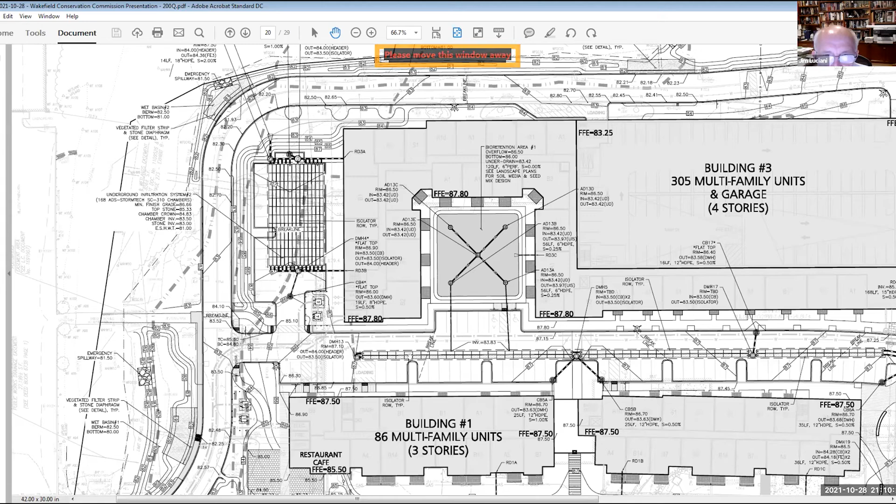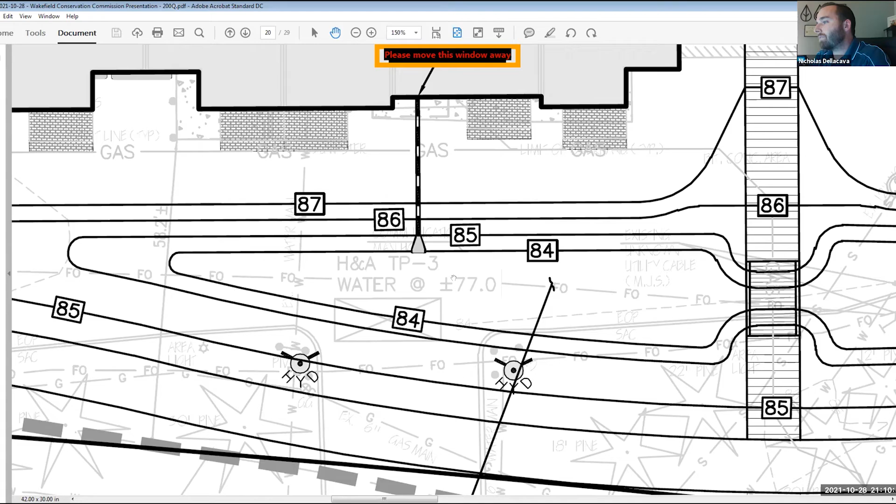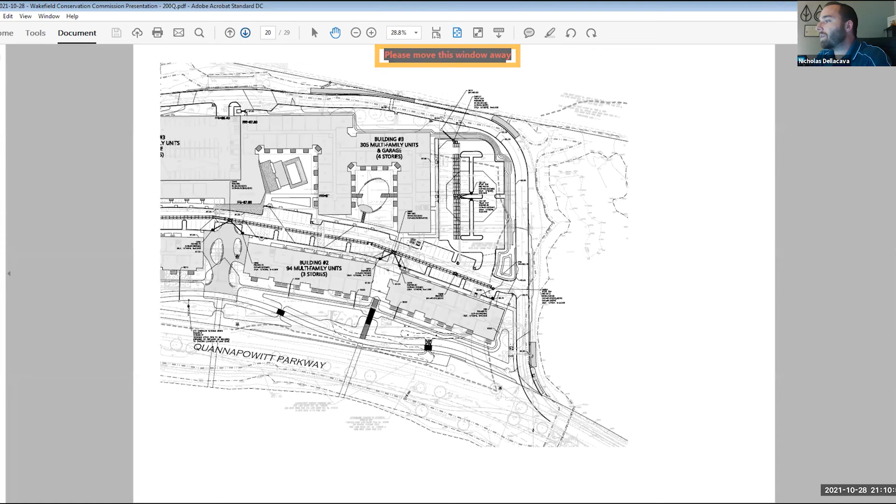Yes, so the wet basins - we established the seasonal high water table at elevation 81. We did a number of test pits out here, and I know you wanted to see these on the plans. They actually are on the plans, they're just shaded back, so I can understand why they were missed. There's a test pit here - they established it at 77 at this location, but I think they conducted at least 6, 7, maybe 8, maybe even more test pits out here, and they were witnessed by the town engineer.

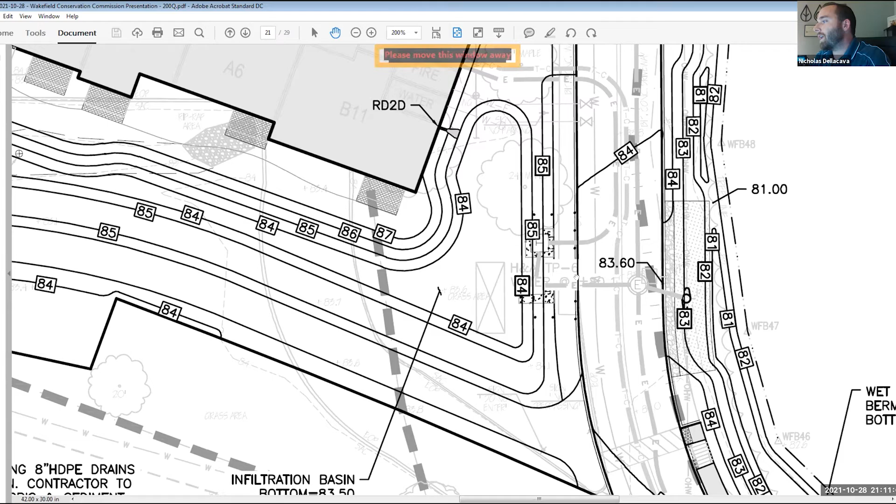Yeah, I saw that in the report. It established the seasonal high water table at elevation 81, and I think we both agreed that's a pretty conservative water table, because a lot of these came in well below that, somewhere in the high 70s, 80. What is the water level in the lake?

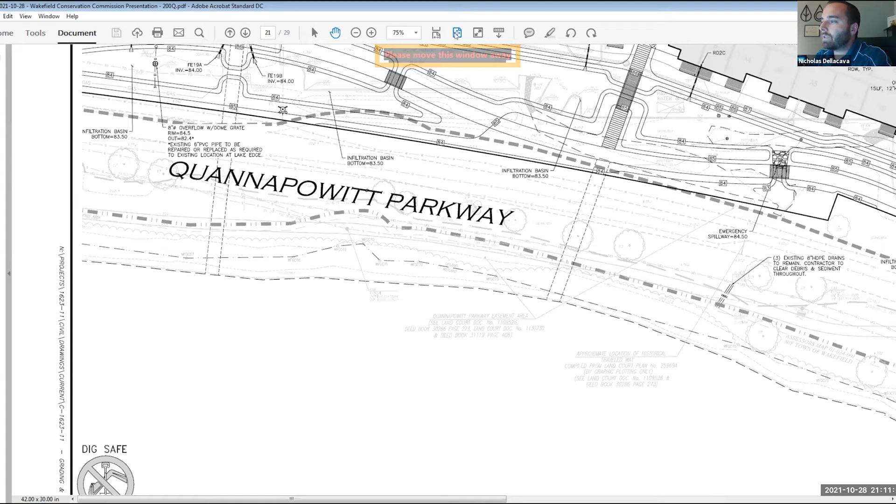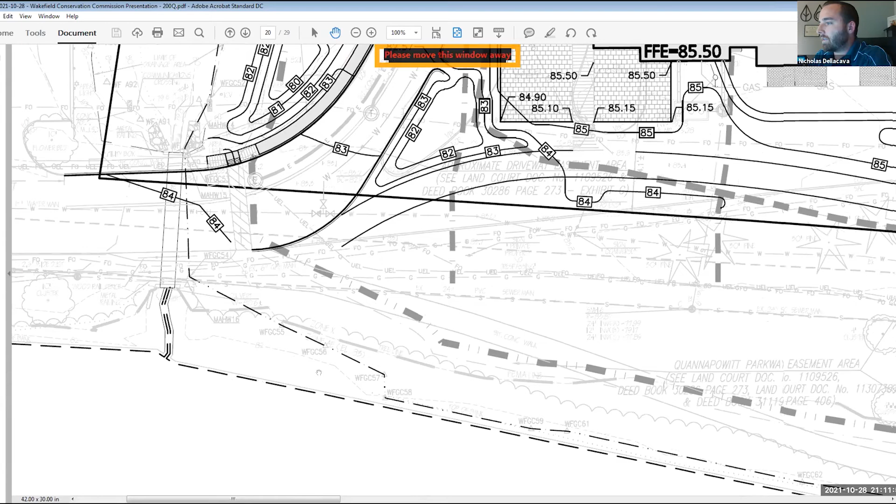I believe it's around elevation 79, but it varies because it's dam controlled. He put stop logs in, so you could probably figure out what the maximum could be before it started to overflow. They're at the bank right here - you're at elevation 82. So it'd have to get, it's never gonna get above like 83 even.

And the whole site is at least 84 up here. But I think to answer your original question about the water table and how much water is in these ponds - the bottom of this basin is at elevation 80. So if the seasonal high water table is at elevation 81, I'd anticipate it to sit somewhere around 80 a decent amount of the time. And if it sits at 80.5, then you've got 6 inches of water in there.

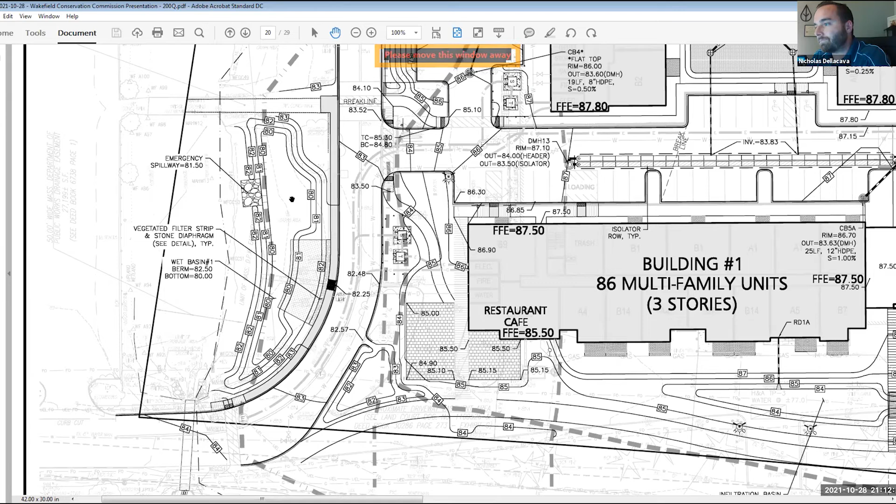Okay, so now the water table on the property is still about even with the lake, correct? What can we assume - whatever the elevation of water is, if the lake is at 79, then the groundwater in your area is going to be at 79 as well? Yeah, I think that's a safe assumption.

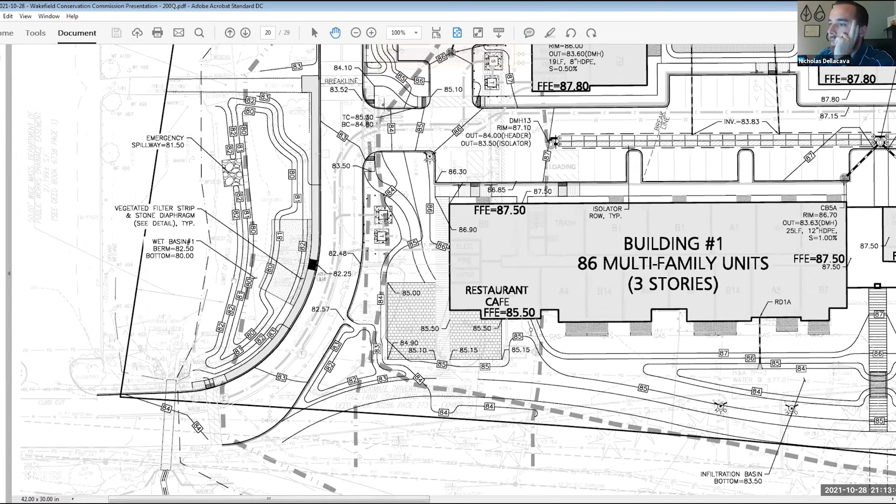Okay, so you could have as much as a foot of water sitting in the bottom of these things 24 hours a day. Based on what you said - if the lake was at 79, that's below the bottom of the basin. So there would be no water in this, by your theory? I'm sorry, what I meant to say was that you would have to fill it up to that point to even break the surface, right? To even see water in the bottom of this, the groundwater would have to be above 80.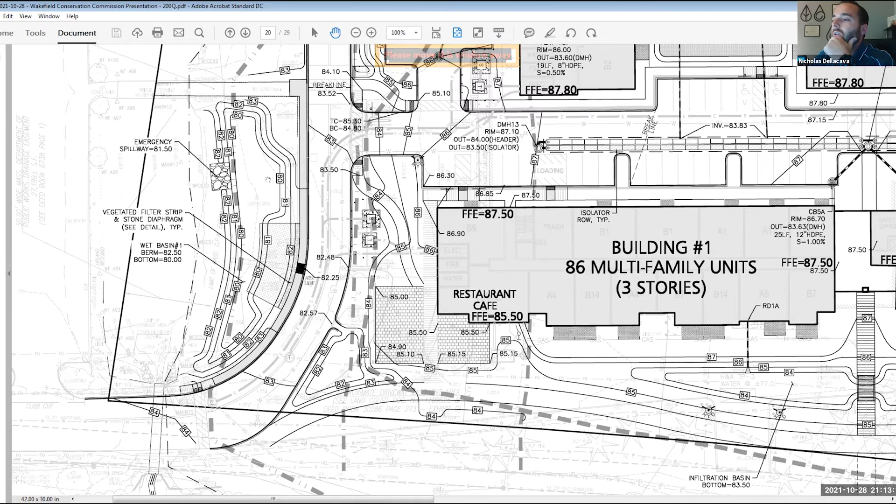Actually, it probably doesn't matter how much - the groundwater would have to be above 80, that's correct. And it doesn't correlate perfectly with the lake. I mean, if you dig a hole in here, you're probably gonna encounter water.

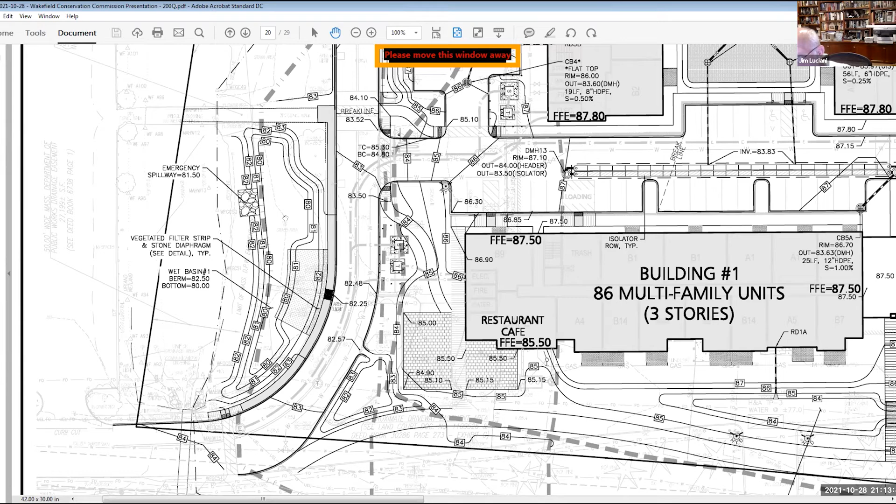Okay, well I need to look at that some more. I do think it's an interesting way you did this.

Just for the record, I know you're aware we've been in front of the ZBA for a few months now. As part of that process, we've been working very closely with the town engineer. He's peer reviewed this multiple times. We've gone through a couple peer review memos back and forth, got on a bunch of Zoom calls together, and discussed a lot of these BMPs we're proposing and how they're situated on the site. So he's really vetted it out a lot, and I think he would back that up if you reached out to him.

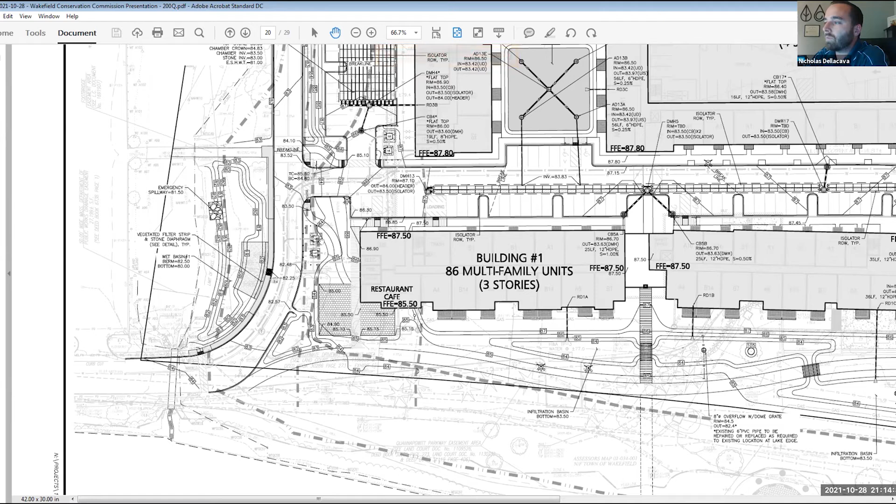So it's not like this is the first attempt, we've gone through a bunch of iterations of this design, and what we have right now is pretty good. For instance, off the top of your head, what would be some of the major points that you changed because of your discussions with the town engineer?

The biggest thing are these wet basins. Let me go back to this plan, it's a little easier to see. We went in initially with the chambered systems pretty much where they are within the site and the parking lot, bioretentions where they are, and we also included these surface infiltration basins at the back. What we didn't include was the wet basins.

Through the process of the peer review by the town engineer, he made it clear that he wanted to see an 80% nutrient load reduction going into the lake. So even with all these systems on site, I still wasn't able to hit the 80% because of all the nutrients I was missing from the parkway itself. The parkway is just too low to utilize these BMPs on site. So to combat that, I incorporated these wet basins beyond these vegetated filter strips to capture the runoff from the parkway and provide enough treatment to get the whole site up to 80%.

So that was the biggest thing that's changed since the beginning. Okay, that sounds like a big one.

How do you tell if you're actually... I mean, do you test the water to see how much phosphorus and nitrogen? How do you know the thing is working?

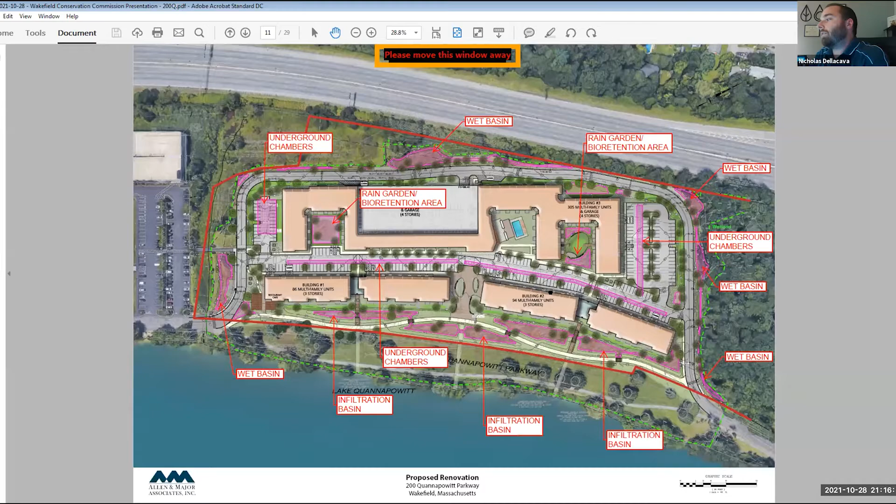That's beyond our scope and honestly beyond my expertise. What we use is the worksheets and tables given to us by the EPA. The EPA regulates how well these systems can perform, as well as what sort of nutrient loads we can expect based on the different uses of the property. So I suppose a scientist could go out there and test these over the years, and I'm sure the town may even hire somebody to do that for the lake as a whole. But it's really beyond our scope of work.

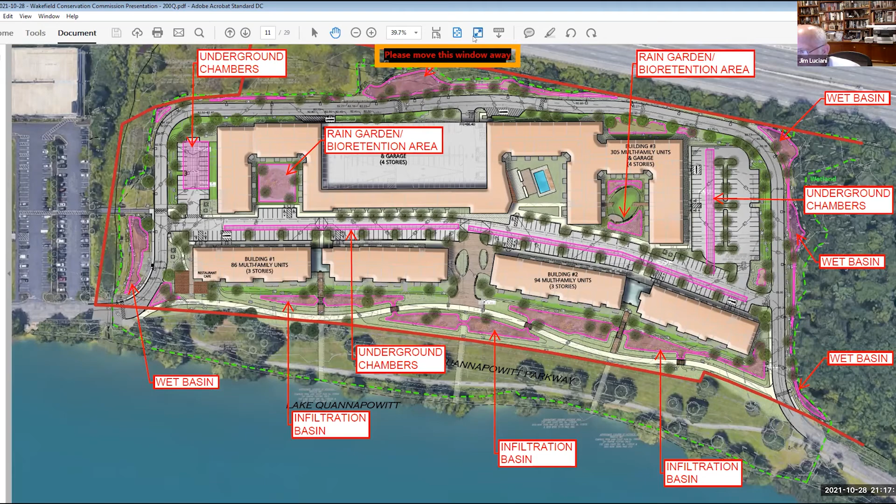So is that pretty much what you want to present for tonight? Yeah, I think so, unless Matt, if you have anything else you want to bring up. Do we pretty much have all the points covered?

Do we have these drawings you're just putting up showing the floodplain elevations? Yep, they're included, they should have been included with the notice of intent filing. Actually, I know they were included, I don't know if they were included in the actual report itself or as an attachment. I can forward them to you if you need them. Well, I'll see if I have them, but like I said, I want to understand what's going on.

Can you supply us some cross sections? I know you said you would, but it's just kind of a reminder. I want to see how the whole thing, like a slice through it, to see how it's actually all put together. Yep, it's not a problem.

Okay, if there's nothing else, Bob, what do you want to do? Well, are there any other questions from the commission?

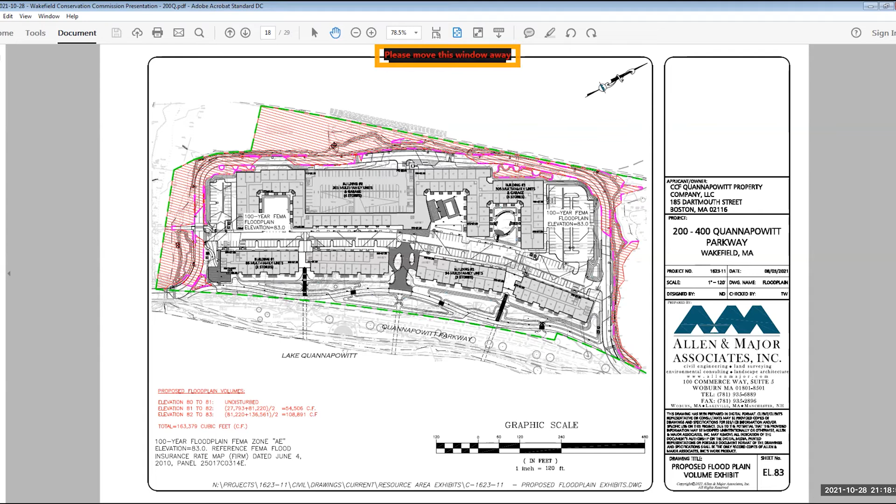Now what I want to do is bring up a picture, if I could. Okay, or I'll stop sharing. Can you see that? We see the picture of you with the pyramid behind you. Oh no, that's probably not the one you're trying to share.

Is there a share screen option? Yeah, at the bottom middle of your screen in Zoom is a share screen option. So if you have selected the image you want to share with us, click on that share screen box, and then share screen, and pick the image that shows up in the window that you want to share with us. You're trying to share an electronic image, correct? Yes.

So make sure you can see the image yourself. I see the image. Then when you do share screen, a window should pop up, and you should see any windows that might be opened where you can select from.

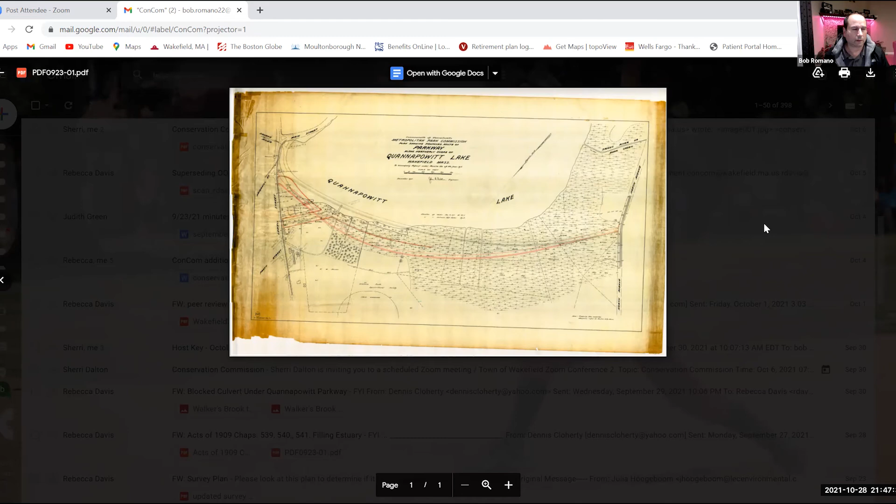Bob, one from me. Just wondering whether there was any consideration by the applicant of pervious pavement for the parking and interior roadways in the development, and whether that would have any incremental value in terms of their water retention activities.

Yeah, I can answer that. So we did look at pervious pavement. The issue with pervious pavement is it becomes clogged pretty easily, and the storage volume within that pervious pavement below the pavement itself really isn't enough to treat the volume of water we need to hold and treat on the site. So that's why we went with the chambered systems, because they can hold a lot more water and are a lot more efficient in doing so.

Are there patio areas or anything proposed that have pervious pavement? I can't say for certain, but I believe the landscape architect has incorporated pervious pavers in their hardscapes. Okay, and I'm sure he'll go into a detailed discussion about that when we discuss landscape. Okay, thank you, good question.

Any other questions? All right, if there are no other questions, we'll be continuing until November 18th. Is there any information right now the commission would be looking for as a result of tonight's presentation?